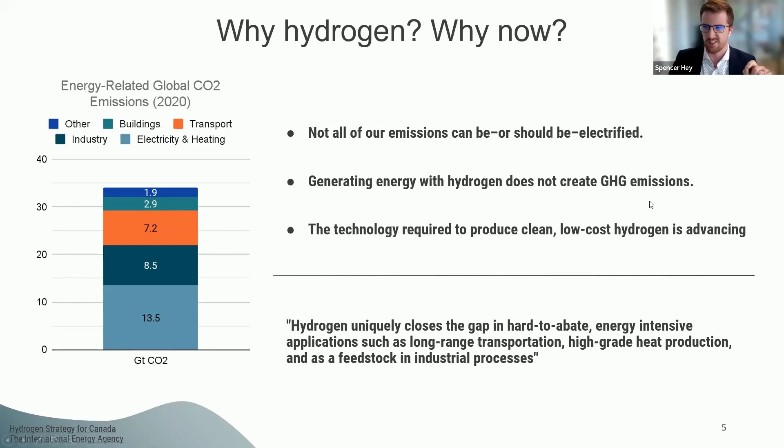This is from the Hydrogen Strategy for Canada, which is a great read if you're looking for a new book to pick up on your nightstand. This is how they frame it: hydrogen uniquely closes the gap in these hard-to-abate sectors - energy intensive applications, long range transportation, high grade heat production, and feedstock in industrial processes. I'm sure there are petroleum engineers on this call who have worked in hydro treaters, and I bet they would say you can't add hydrogen to renewable or to fuels without actually having hydrogen. So it's really that solution for those hard-to-abate corners of our industry.

So that's the high level why, right? We've got this big emissions problem that we're trying to solve by 2050, and electricity and renewable energy can't do it all. It can do a lot of it, but it can't do it all. So we should use a molecule that doesn't create greenhouse gas emissions to make up for it. And the technology is finally coming along to enable us to do that. I'll pause there - I know Shantanu has questions for us, and then we'll get into the next section.

Yeah, that was really informative, a very cool perspective from the hydrogen side on why now. Related to long range transportation, in your research and opinion, what's a better choice - hydrogen fuel or battery electric? This is a very hot topic as we look to change the way we drive as passengers, but also all those trucks that deliver groceries and resources across the country. The idea is that while battery electrics, your Teslas of the world, are really well suited for passenger vehicles and daily trips into work, the math doesn't really add up right now when you get into long range transportation modes.

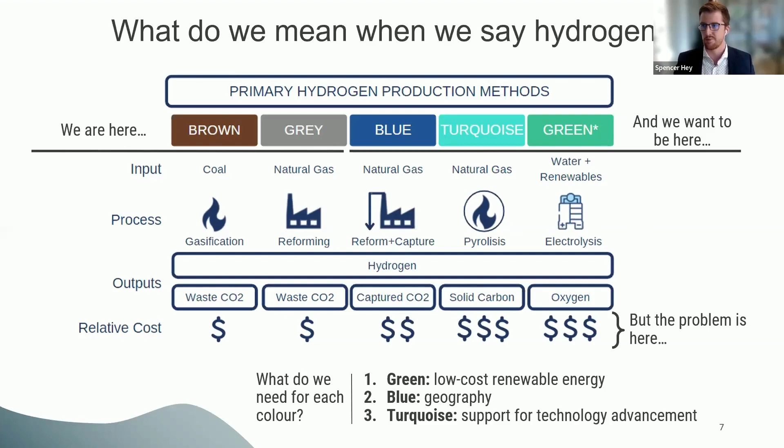But as you can see right off the top, that gray, that brown, those unabated fossil fuel inputs are really the least expensive ways to produce hydrogen. I did run into a report that indicated some producers are making gray hydrogen at like $3 a kilogram. My recommendation to that company would be to not do that anymore, they would just stop that. It's really that $1, $2 space is where you need to be.

And then of course you get into blue and green hydrogen. So blue hydrogen, when you think about the cost of it, is really gray hydrogen plus capture and transportation and storage. And so in a particular region, if they create gray hydrogen, blue hydrogen will always be more expensive because it's gray hydrogen technology plus capture and transportation and storage. And so a little bit more expensive, but if you do it right at the right scale, you can actually be very, very competitive.

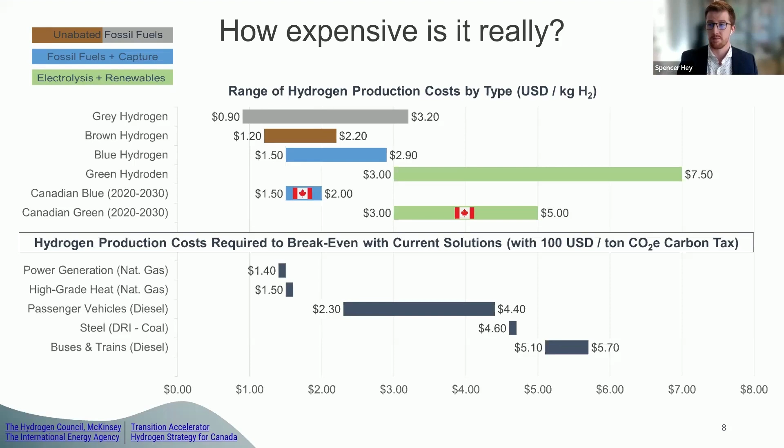So a lot of information there. I think the story is, right now we're producing hydrogen in a really unabated fossil fuel way, a sort of dirtier way. And we have the technology today to get to clean hydrogen production, particularly in Canada, if the technology is there. But there's a big role for government to play, and a big role for private industry to play to get us there. But if we build that infrastructure and really commit to it, we can actually start eliminating those emissions right now.

I know there was a lot of information there. But Shantanu, I wonder if we should take a pause for a couple of questions you may have for us before we get to the next section.

Yeah, you bet. I think there was a lot of learning there, even on the different colors. I think you hear a lot of people saying them, but sometimes you're not quite sure what they exactly mean. So thanks again for running us through that.

I guess to add to that mix, I've heard there are a few other hydrogen colors such as pink, purple, and yellow. Would you be able to elaborate on what these are and how they fit in with the other ones?

Yeah, absolutely. And again, I think the role that the intelligent pioneers in the hydrogen industry played was just to confuse the concepts, because they're all relatively the same. So like I said, in that fossil fuel space, you might have heard of black hydrogen, which is just coal gasification, similar to brown hydrogen, but they reclassified it because it's technically a different type of coal. So we'll let them have that one.

In the yellow, pink, and purple space, it's all really, in my opinion, in that green hydrogen bucket. They've recategorized colors to identify the actual renewable energy source, but it's still the same process: renewable energy plus water and electrolysis to split out your molecules. Yellow is, I think, a play by the solar industry to give themselves their own category — it's solar power plus electrolysis and water. Pink and purple refer to nuclear.

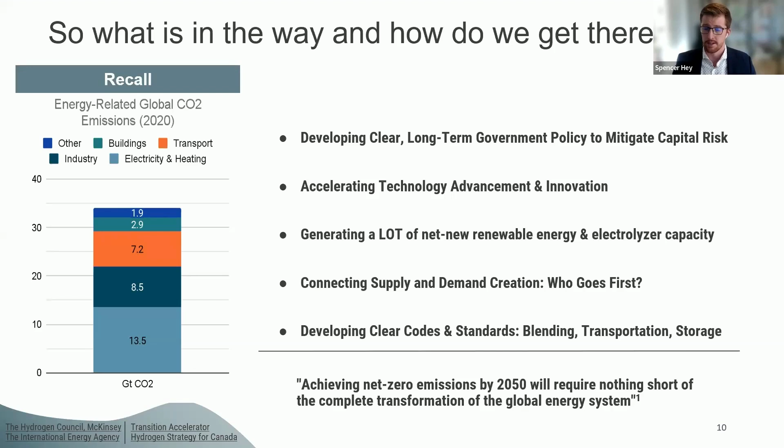This third one, I think the problem with green hydrogen right now is we underestimate how much renewable energy and electrolyzer capacity we actually need to make green hydrogen a reality.

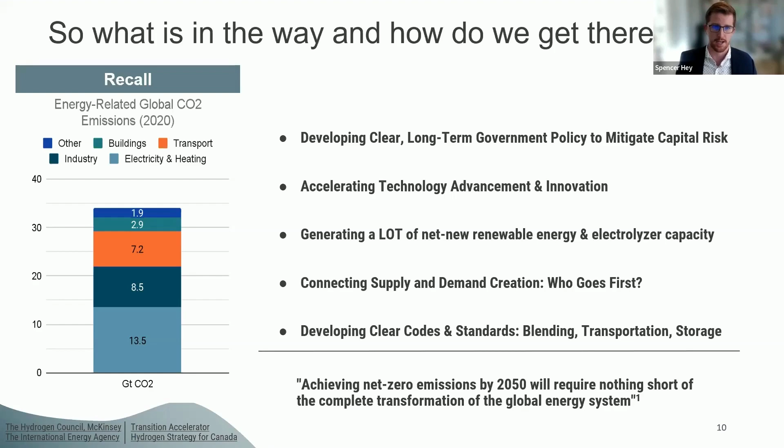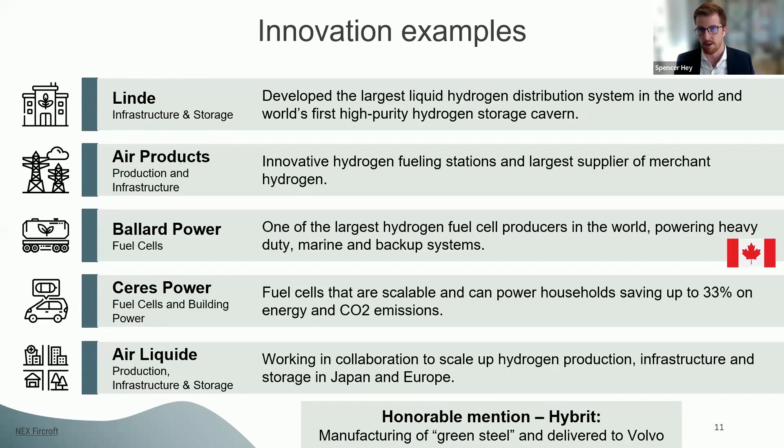A second one, honorable mention, a personal favorite of mine, is a company called Hybrit. They're a consortium of Swedish organizations that have come together to make green steel. Steel itself makes up some 6-7% of total carbon emissions, and they substituted coal and other fossil fuels and natural gas with green hydrogen—hydrogen created with renewable energy—to make steel. They actually produced steel and sold it to Volvo on a pilot basis, and I think they have a demonstration, an industry scale facility they're looking to bring online this year. They're really trying hard to decarbonize steel already today. There's a lot of other great companies on this list as well.

So that's the why, that's the what, that's the how. Shantanu, I'll pass it back to you, and I'll actually hand it over to my esteemed colleague, Griffin Smith. He's going to take us through the next couple of sections here. So Shantanu, Griffin, over to you.

Thanks for that, Spencer. Yeah, in terms of how we think about hydrogen production and the innovation going into this space, it's quite exciting to see the level of progress we've achieved. Is there a particular portion of the hydrogen puzzle that needs more maturing in your research? Maybe I'll hand that over to Griffin if he wants it. He's quite passionate about this space. I'll let him answer that for you.

Yeah, I can speak to it a bit here. I won't dive too deep into it because I think Spencer touched on it a lot there. But I think some of the challenges we've already highlighted a lot is cost, right? So how are we going to deal with the cost aspect? In some instances it's 5, 10x, right? So how do you really deal with that? Ultimately, what that means is the capital risk for companies to pursue these initiatives and take them on. So I think that's probably number one.

I think right behind that comes the infrastructure. It's kind of that chicken and the egg thing. Supply versus demand, what goes first, followed by what comes after. And if you don't have the infrastructure in place, you're not going to be able to get that demand. And then does the supply really make sense to produce, right?

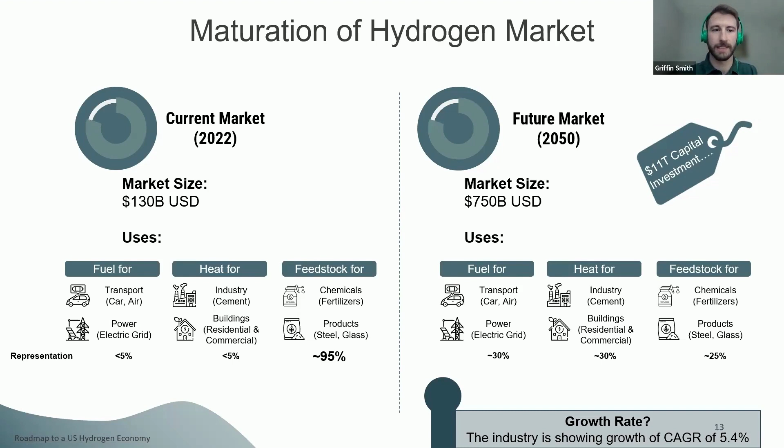All right, we can jump to the next one, I believe.

So Shantanu, I think we might have one or two questions. Maybe we'll go with one question for that last slide. I think in terms of thinking about this, there's a lot to the puzzle, and in terms of the areas we look at in the hydrogen economy, which one do you think has the most potential for growth?

Yeah, it's a good question, and I think Spencer touched on it a lot. I think transportation really shows high potential, and this might answer some questions we'll see at the end. Hydrogen is an extremely light molecule, and I believe it's the highest energy density fuel source as well - don't quote me, I'm going back to my university days. So the combination of something super light that we can gain a lot of energy from, and that if done the right way can produce zero emissions, is very exciting. So I think transportation is the potential opportunity.

The second one I would say is heating from a building perspective - we do have a lot of emissions that come from that area. So I think those two pieces, being big portions of that initial screenshot Spencer shared of our current emissions state, are both potential opportunities.

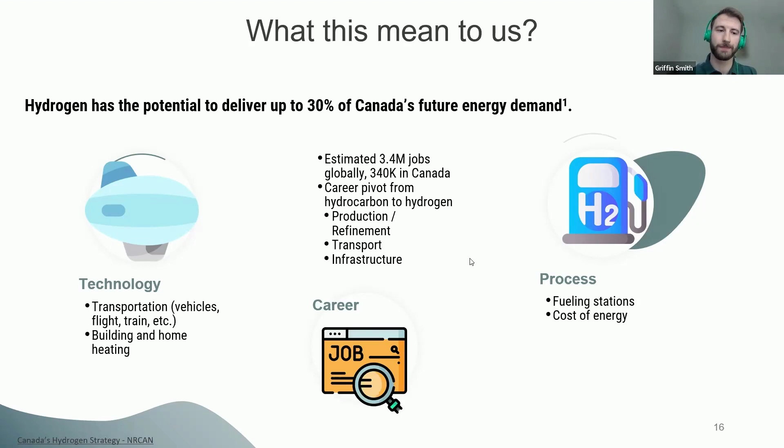Thank you again, Spencer and Griffin, for giving us a bit of background and an understanding of how complex the hydrogen economy really is, but also the leaps and advances that have been made in the past few years, and where we're looking for in the future, as well as Canada's role to play.